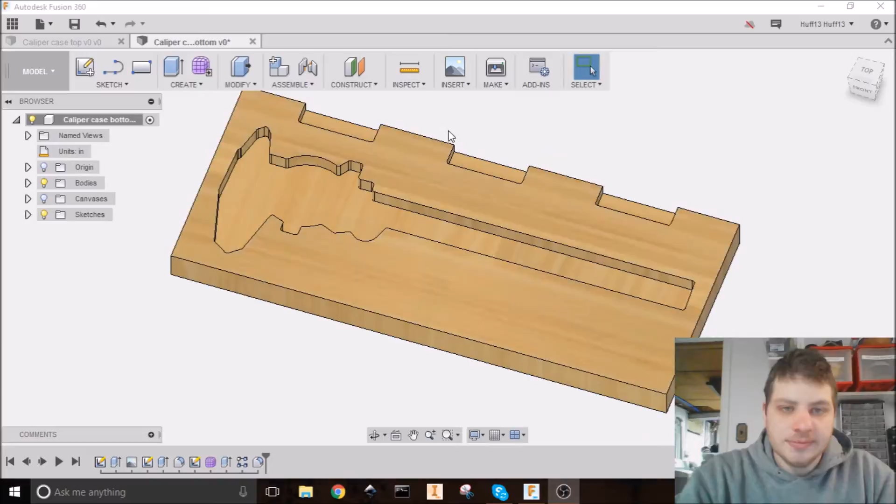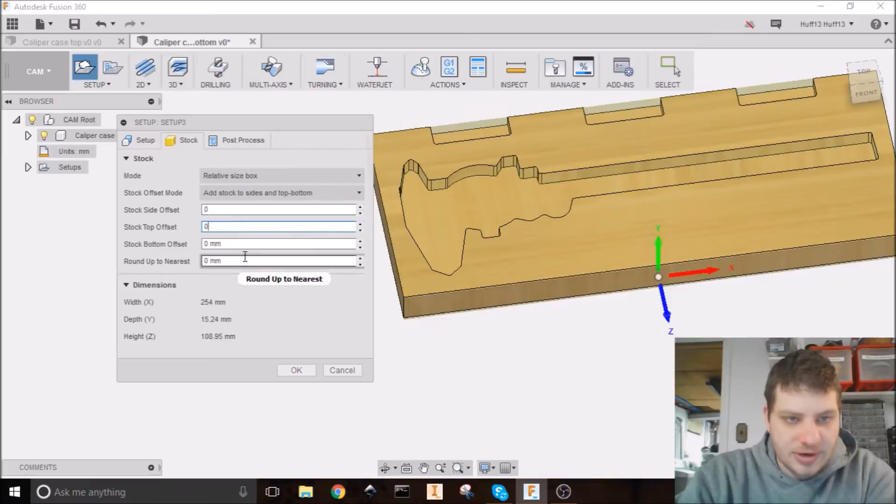So let's switch over to Fusion here. This is half of our case. I have the other half in another file. I'm going to start by going to the CAM portion of Fusion 360, and we'll start with a setup. So first thing we need to do is set up our stock, relative size box, and I actually want the offsets to be 0 on everything. Because I'll be cutting the wood to the rough size on the table saw, and then only putting in the pockets. I'm not going to be dimensioning the wood with the CNC at all.

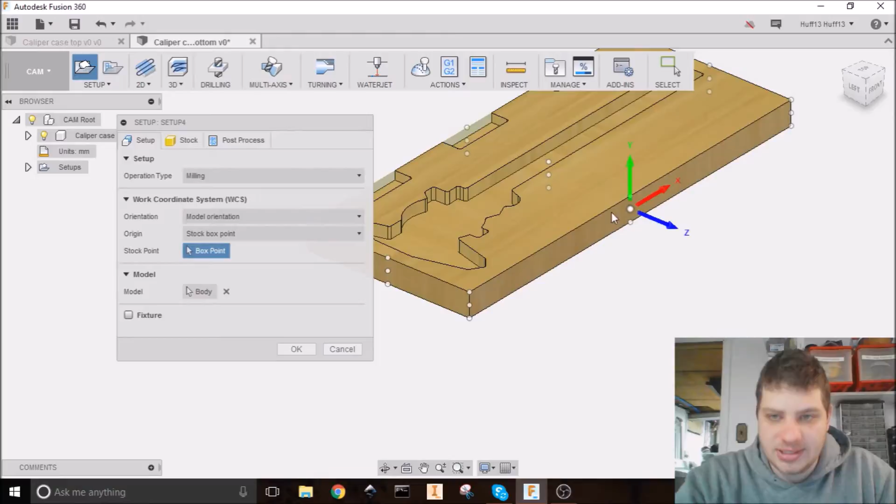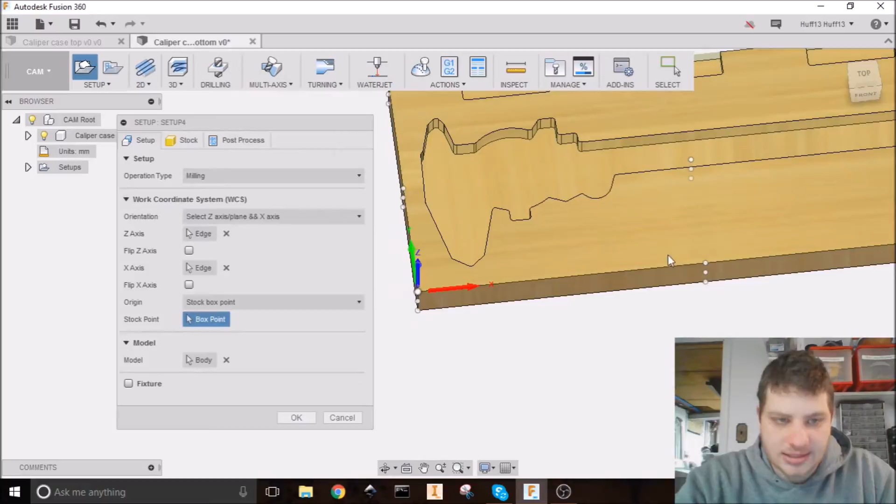Now that we have our stock set up, let's go back to the setup tab, and we need to move our stock point, or in other words, the 0 point of this model. I'm going to put it right down here on this corner, and then change the orientation, and I'm going to set the Z-axis. So the Z-axis, I'm going to click on this side here. Yep, and the Z-axis is up, Y is that way, X is that way, which is how my router works, so that'll be right. I'm going to hit OK. So this will be the bottom left of what we're actually cutting.

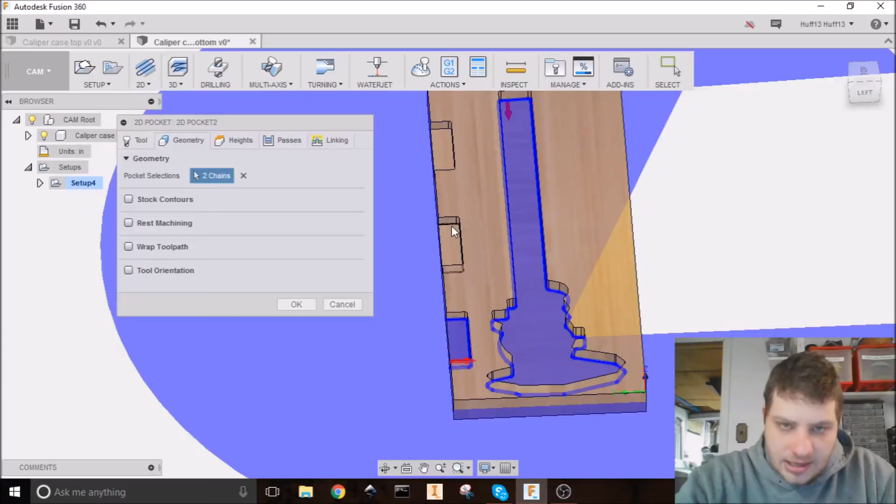Now that our setup's done, we need to do our milling operation. None of these have vertical curves, so they're all going to be 2D operations. I'm going to go to 2D Pocket and select these profiles. There's our 2 different operations there. Our tool is going to be a 1/8 inch flat. And then our speeds and feeds, 24 is a little bit conservative. Let's go 35, 35, 35. And I always like to have a low plunge rate, so let's just change that to 20.

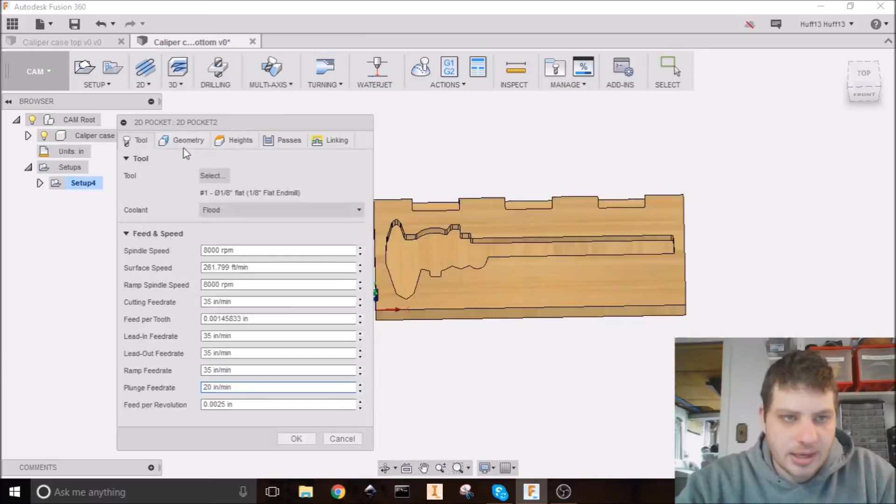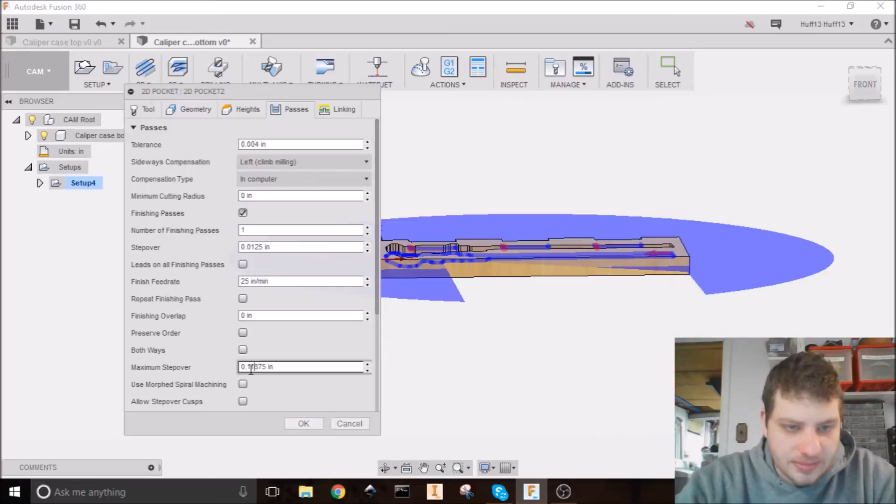The geometry looks good. Heights, those also look good. Passes, now these we're going to have to change. We want climb milling. We do want finishing passes this time. We'll just do 1 with a step over of 0.0125, looks good. We'll turn down the finish feed rate just a little bit. Let's do 25. And maximum step over, we're just going to turn down a little bit. How about 0.09? Step over cusps. Okay. Hit OK on that. And it will generate all of our toolpaths here.

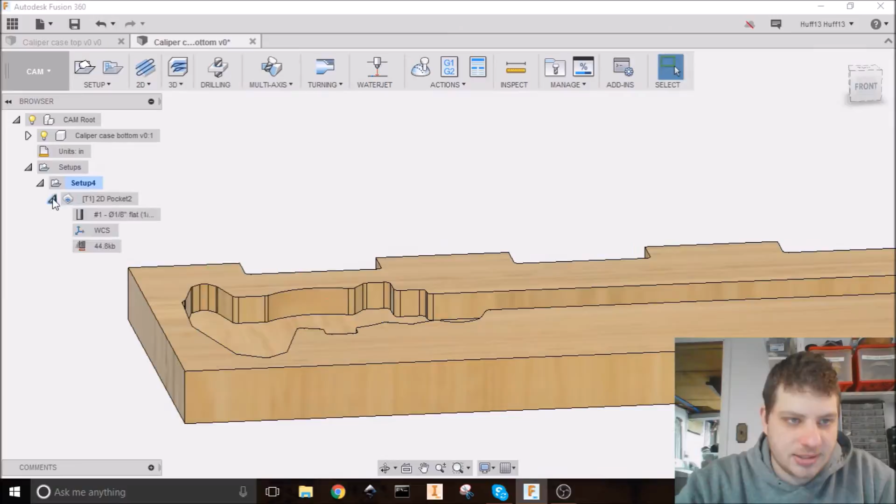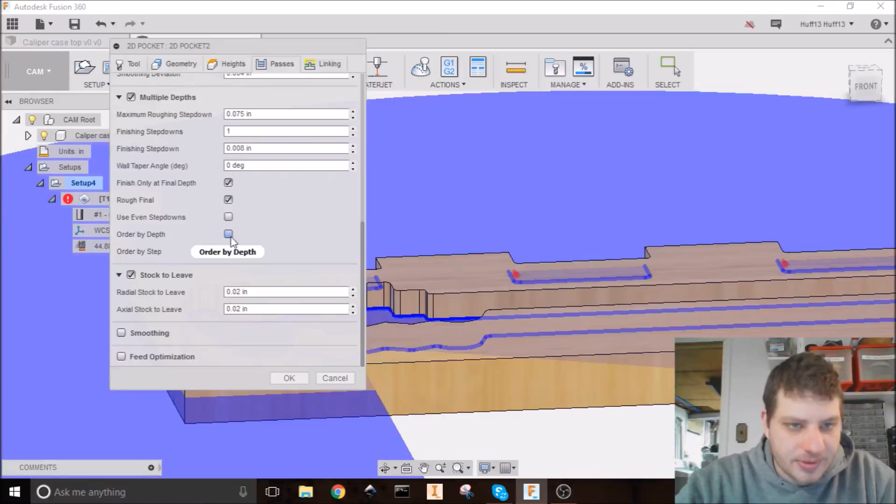Now I missed something. There should have been multiple depths on this with my little wimpy CNC. So I'm going to go back. Let's go back here to passes and check this multiple depths button. So I'm going to scroll down here. The maximum roughing step down, 0.04 is too conservative. Let's do 0.075. Might still be conservative. Let's do 1 finishing step down, and we'll leave it at 8 thou, and only finish at final depth. So we don't want to leave any stock, because we don't have to do this multiple times, and we should be okay.

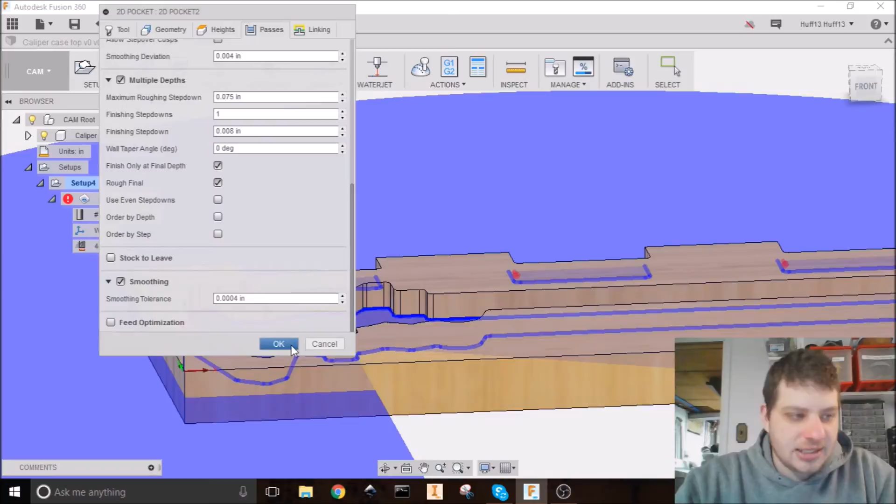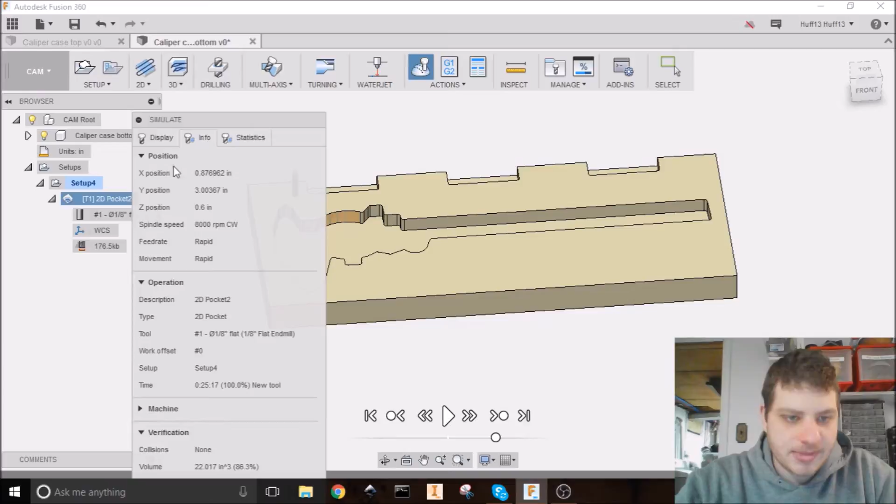I am going to go over here and click smoothing, and again scroll down, and then leave the smoothing tolerance as 0.0004. That helps reduce the size of the G-code a little bit. Let it regenerate again. And there's our toolpath. So I'm going to go up here and hit the simulate button. I'm going to hide the toolpaths, but I'm going to show the stock. Change it to wall paint. I wish they had better choices on these stocks. Should take 25 minutes to run. Everything else looks good. And let's hit play.

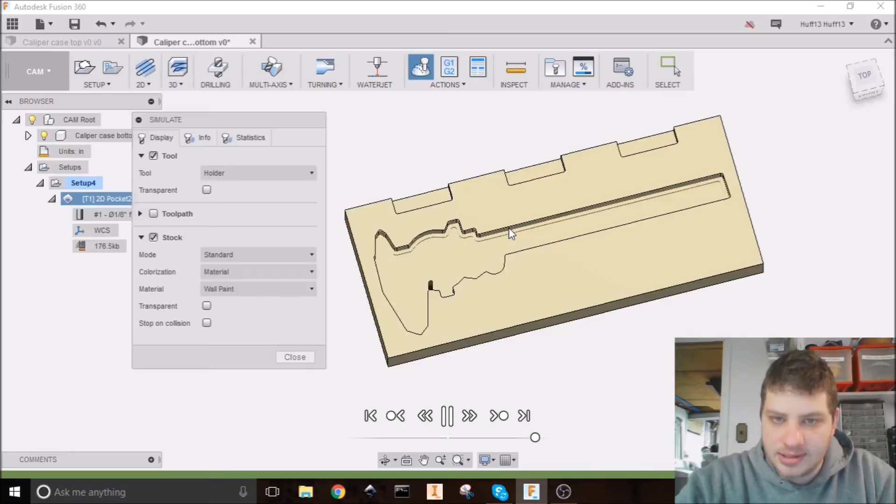So starting with the edge pocket there. Fast forward it a bit. Then it goes to the other pocket and the other pocket. And now it slowly clears out the calipers. All right, so now we can go and look for any material that it's left. Looking at this, it doesn't look like it's leaving any extra material, which is great. That's why we put all these fillets in, so what it's cutting out should be exactly what we're expecting. That should work. So I'm going to hit close.

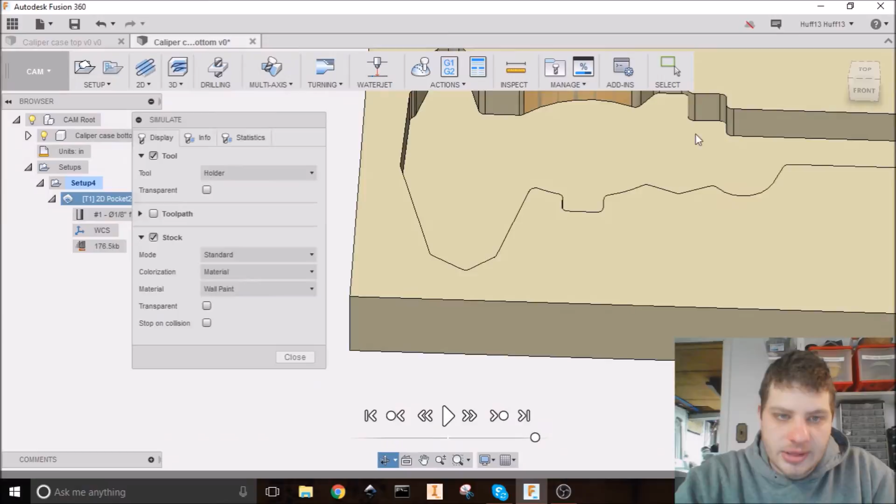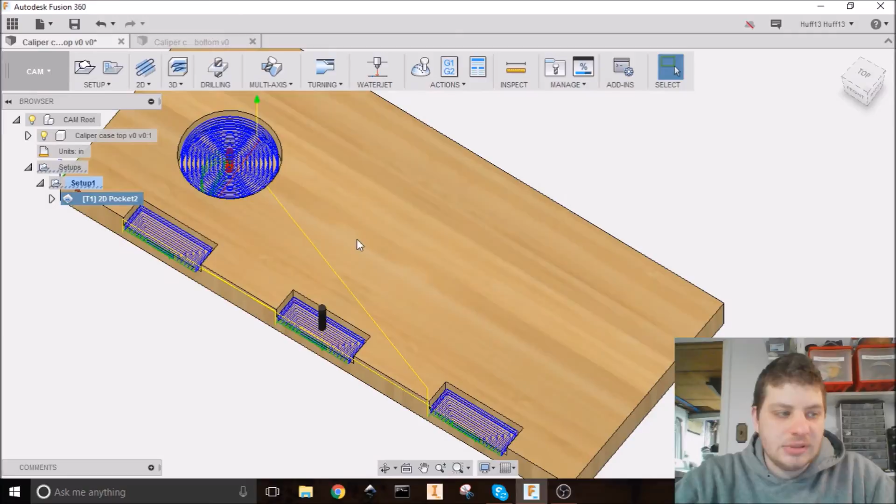And that looks good. I'm going to save this, and now I'm going to go ahead and do the other side. I'm not going to show you that because it's exactly the same thing, but even simpler. So here's the other side. You can tell it looks exactly the same. I used all the same tools, all the same setup options, and I'm going to go ahead and cut this now. I'll be back in, well, it'll be about an hour my time between all the setup and the cut time, and I'll show you what it looks like.

So it's actually been a couple of days since I did the rest of the video, but I went ahead and finished my case. This is that same piece of maple. It has a Danish oil with a stain in it as the finish, and you can see the yellow hinges, which I'm not a huge fan of. I might replace those with black, or I have some silver filament that might work better. But the caliper fits nicely down in there. I did have to go through and make some of the areas a little bit wider with a chisel, especially on the hinges here. I did a lot of chiseling around the hinges. I just mismeasured or something. But other than that, it's perfect. There's basically no jiggle to it, but it does come out easy enough.

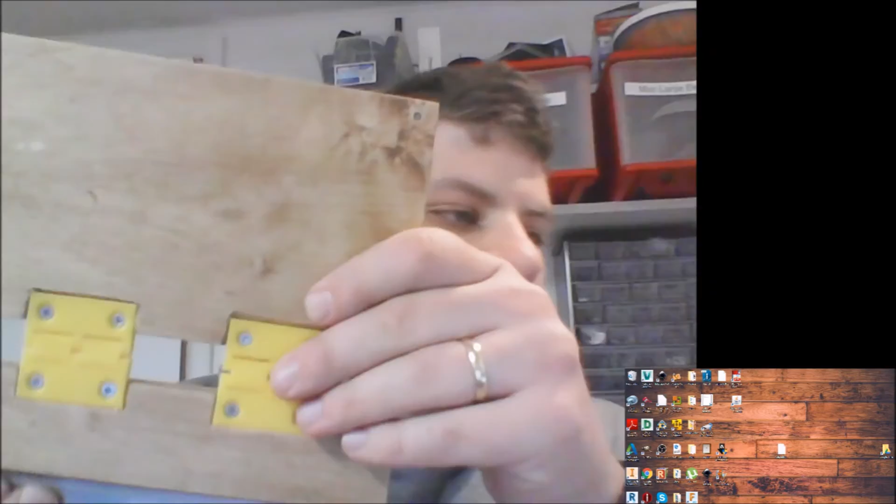It goes back in. If you look at my design, you may notice I made a mistake. So this little notch right here, that was not in my CAD. That's for this little knob. It was in the picture, but when I did the model for the top half, all I did was take into account the circle for the dial. That knob was in the way, so I just drilled that out with a Forstner bit. But as you can see, it goes together, it works, it closes. I might do some improvements to this in the future. I think there's a lot of wasted room on the inside. It could have a pencil or maybe a slot for my little ruler in there. But overall, I'm very happy with it.